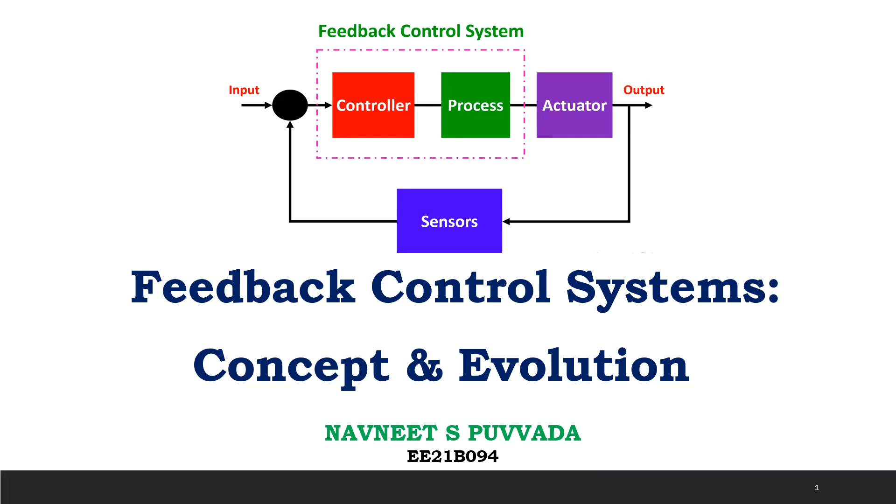So what exactly are feedback systems? Feedback systems are basically systems which use the output to modify the input to achieve some desired result or to maintain some particular state. That's simple - you use the output to modify the input.

This feedback control is seen everywhere - mechanically, electrically, and even biologically. Our body itself maintains our body temperature using a feedback mechanism. If our body temperature goes too high, vasodilation or vasoconstriction happens, and the temperature reduces. The flowchart here represents what I just said.

So negative feedback loops are seen everywhere and they're basically used to modify some state variable using the output. A device using a feedback system is also called a closed loop control system because, again, the output is fed back into the input.

This is the basic flowchart of how a feedback system works. You give the input, you find the error using the feedback signal. This error signal is appropriately analyzed using a controller, and then it is sent to an actuator and a plant which give the output. And this is again fed back into the input using feedback.

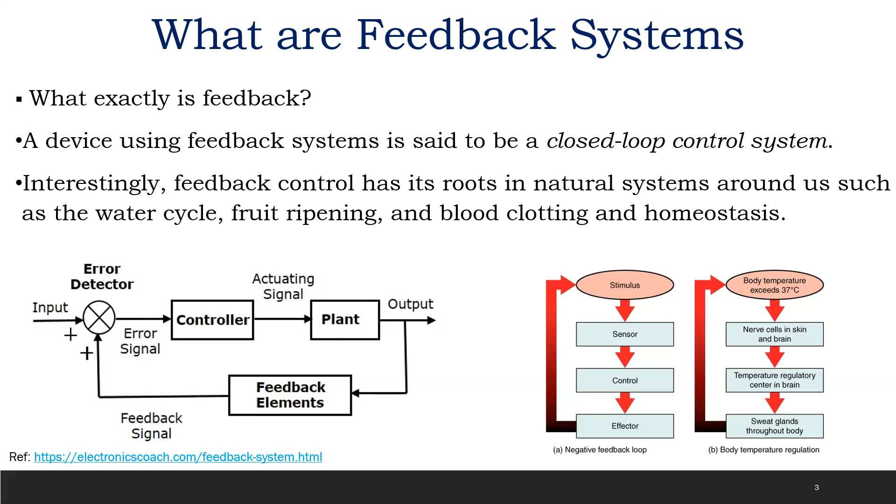Now, where can you see this feedback control, naturally and man-made? A really interesting point is that human evolution is the most perfect example of feedback. Evolution over long periods of time is only due to feedback, and it's responsible for evolution. So if a species does well, that is fed back in, and it says this species is more suitable, and more of the species grows. Darwin actually proposed that evolution is primarily due to feedback systems.

A mechanical example is what we use in our everyday life to flush our toilets. If the water level increases over a certain limit, this floater closes the valve and the water flow is stopped. This is again a beautiful example where the height is the state variable and it is fed back in as an input using the floater.

Another typical example are automobiles, and this is feedback we generally start with when we learn how feedback works. It's quite simple: the car measures the difference between the speed we want to go and the actual speed, and it varies the fuel rate accordingly to increase or decrease the speed.

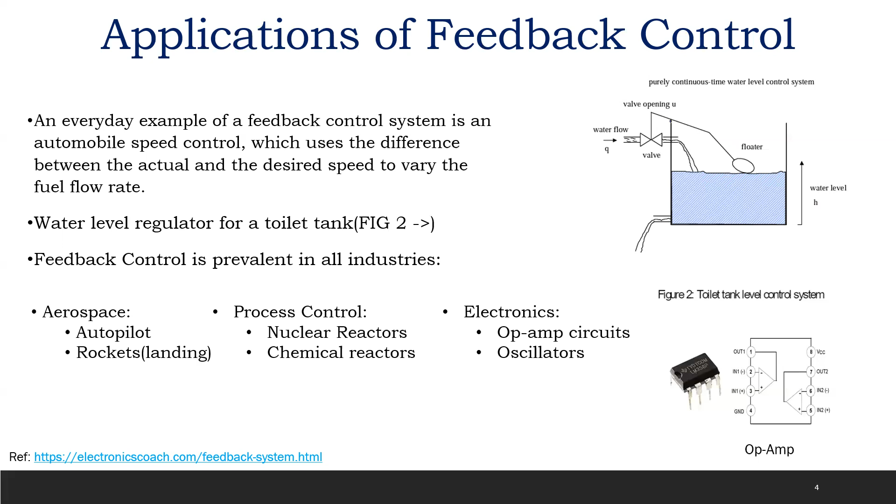So I've told you what feedback is and a few applications, and these can be seen prevalent everywhere - in aerospace, nuclear reactors especially, and of course your electronics, which we'll focus on with your op-amp circuits and oscillators. This is a picture of an op-amp.

Now let's come to the beginning - let's go to the early feedback systems and how exactly they evolved from scratch. The first few feedback systems were definitely mechanical devices. There was no electronics back then, but they still embodied the idea of feedback. A beautiful example is this water clock used to keep track of time.

Keeping track of time became more and more prevalent around the 1500s and thereon. They used these water clocks, which kept track of time using the water level, like we saw in the flush. As the water level increases, this dial turns by a certain amount of degrees - as simple as that. This water supply is controlled using the increase in water level, dictating how much water should be supplied and accordingly how much the dial turns.

Another great example is the steam engine, probably the first major mechanical example of feedback systems. It was probably the beginning of the crazy growth of feedback systems in the 18th and 19th century especially. They were used in steam engines to regulate the speed and power output of the engine, done by regulating the flow of steam into the engine - again quite simple, just like our lever and valve. It regulates how much input we give based on the output. This is a nice picture showing the governor and throttle valve.

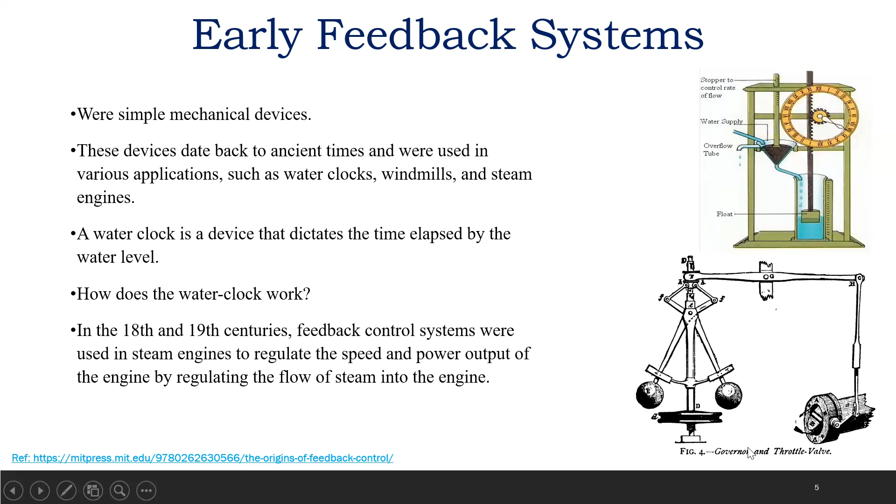Now let's come to the evolution of classical feedback systems. The evolution of feedback systems was probably divided between classical feedback systems and modern feedback systems. Let's go over how the classical feedback systems evolved.

This all started, like with most inventions, with the Industrial Revolution. During the Industrial Revolution, G.B. Airy developed a feedback device for pointing a telescope, and it was probably the initiation of how a gyroscope was built.

He saw that when a feedback loop was not designed perfectly, there were a few oscillations, there was ringing, and depending on the Q factor, there were a lot of oscillations in the system and ringing, which made the system very unstable, and we wouldn't want that in our design. So he analyzed this and came up with the differential equations governing these feedback systems, and used that to analyze instability in these closed loop systems.

So this was the start of analysis of feedback loops, scientific analysis of feedback loops.

Then came the well-renowned J.C. Maxwell. He analyzed the stability of Watt's flyball governor, and concluded that a system will be stable if the roots of the characteristic equation have negative real parts. So using that differential equation, when you find the roots of that equation, if the roots have negative real parts, then that system is stable. We still use this today in a very surface level analysis of feedback systems, and this is a great contribution to feedback systems. Thereby Maxwell established the initial control theory, or the initial theory of control systems.

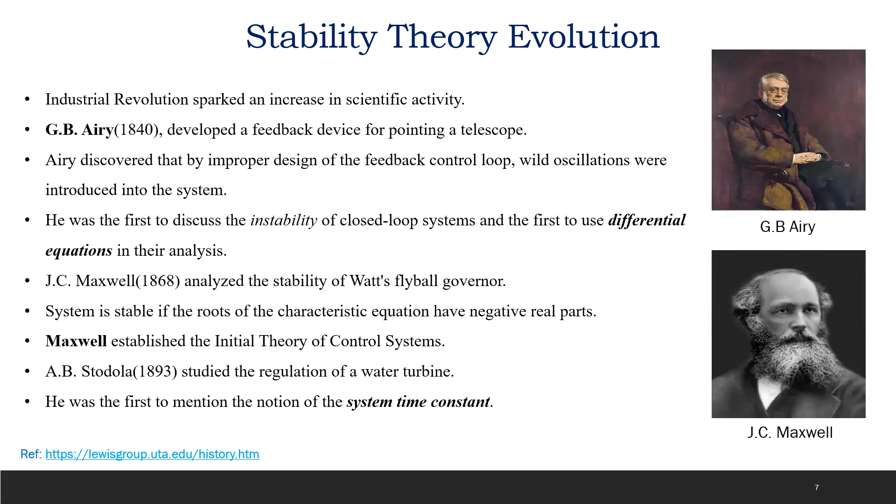Now comes the innovation at Bell Labs. Bell Labs is really well renowned and probably one of the hubs of the greatest innovations in the 20th century, and especially due to the World Wars, there was great motivation for innovation, especially in the communication field to win the war. Here, the mathematical analysis of control systems was carried out in the frequency domain.

Maxwell and Airy, all of them had done a precursor in control systems, basically a very surface level analysis using time domain differential equations. Now the Bell guys came up with very intuitive analysis using frequency domain analysis, especially using techniques developed by Laplace, Fourier, and Cauchy, which we're all very familiar with. Between the 1920s and 1930s, this analysis using frequency domain saw a huge boom, and its applications were unnumbered, showing a clear shift from time domain to frequency domain analysis.

And this is what the classical theory is based on. The classical theory of feedback analysis is based on frequency domain analysis rather than time domain analysis. So classical is analogous to frequency domain analysis. And three men actually in Bell Labs took this frequency domain analysis to another level.

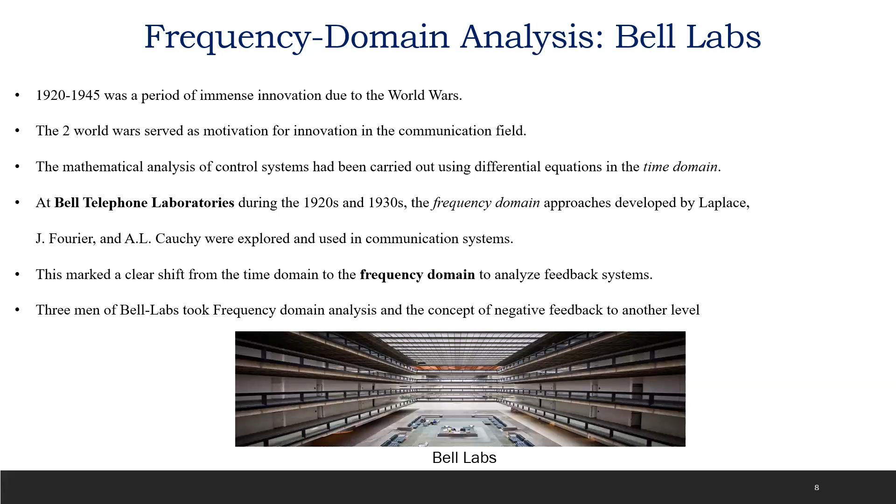By the way, Bell Labs is a company in the United States, and this was during the World War. It was probably one of the biggest companies in the world at the time, and they worked on a lot of different things. It actually came from the invention of the telephone by Graham Bell, hence the name Bell. Now we come to Harold Stephen Black, who was probably one of the fathers of the classical era of feedback systems.

Mr. Harold Black worked in Bell Labs in the mass communications division, and what he was majorly known for was the concept of negative feedback, which we still use and learn today. He wanted to reduce distortion in his amplifiers, which he was using in the telephone line that Bell was working on. He realized that by feeding back the output to the input, we can minimize distortion and get a clean output, and thereby came the analysis of negative feedback.

He also came up with the accurate design of fire control systems in World War II, and again was a major contributor to America's success. And of course, he formed the basis of operational amplifiers, which are completely based on negative feedback, and we still use today.

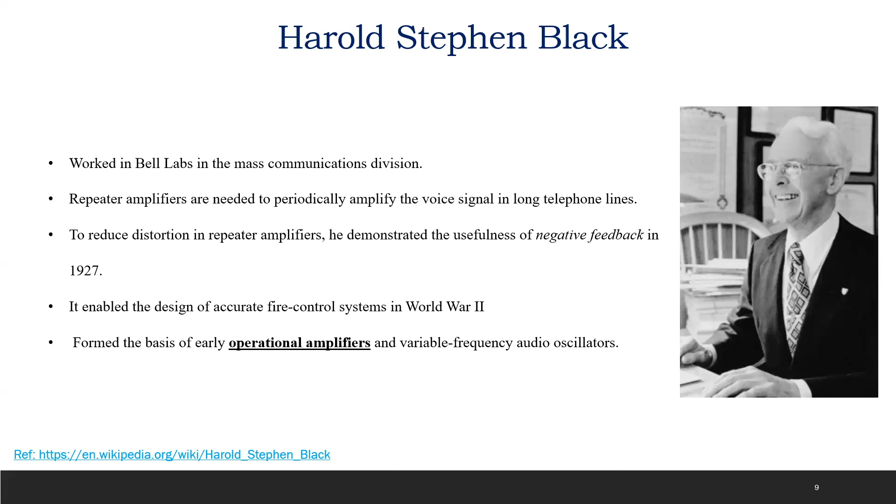And this plot is really beautiful and really easy to understand. To understand frequency domain analysis, you don't need any complicated time domain differential equations, but just by looking at a diagram, you can come to so many conclusions.

So again, he came up with the term called loop gain, which is basically the feedback factor into the gain of the amplifier. This simplified the stability analysis a lot. This analysis is the most comprehensive one in the frequency domain, even better than Bode's analysis, which we will cover later. And it can work when the system is unstable too.

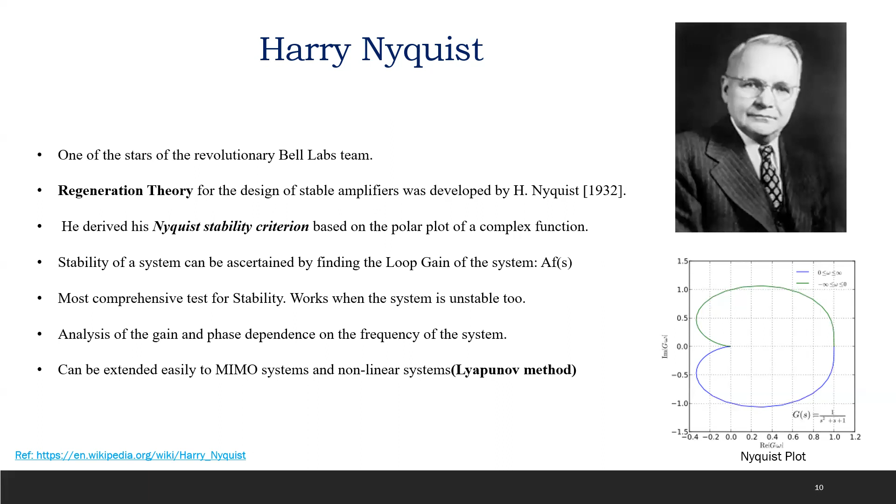Now we come to Hendrik Wade Bode. A lot of us are familiar with his Bode plots and his frequency domain analysis. Let me tell you a bit about him. He is also regarded as the father of information theory. He developed these plots called Bode plots, which basically use the magnitude and phase frequency response to analyze stability and to analyze the feedback system.

He also came up with the idea of phase margin. We all know if phase margin is less than 0, then that system is unstable for sure at unity gain frequency. And this concept of phase margin is so handy in designing feedback systems. It is really important, and Hendrik Wade Bode is the one who came up with this.

He also worked with automatic artillery weapons and anti-ballistic missile systems. So with his theory and knowledge of feedbacks, he helped the US in tracking systems, in weapons tracking systems, which needed accuracy in location and, of course, needed feedback systems in their gyroscopes.

And once again, his Bode plots and his analysis of feedback system was the fastest and the most intuitive way we could analyze feedback system. And it's still used by students in colleges now.

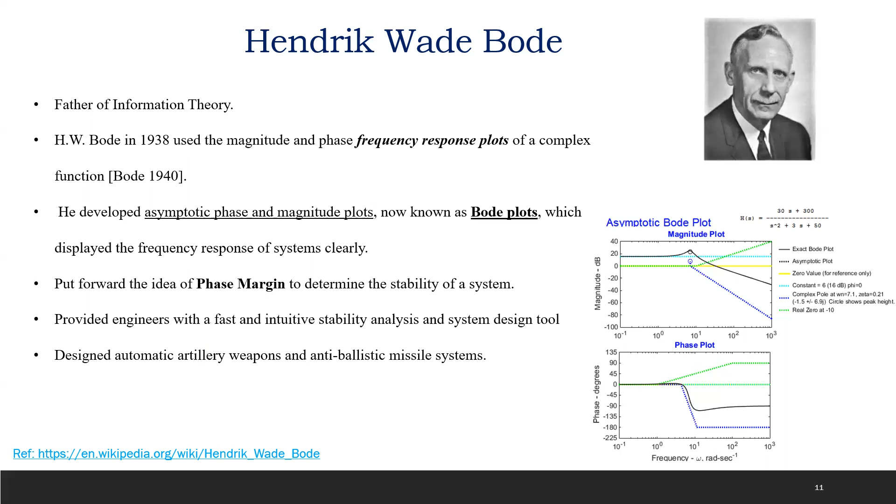So after this, as I said, the scientists I mentioned were working on developing feedback systems. But what was their main motivator? Their main motivator were the world wars. And the world wars were truly a catalyst to develop, because now feedback systems were literally a matter of survival. Location tracking of their weapon systems was so important and could win wars. And that accurate location tracking could be done only using accurate feedback systems.

And this led to the invention of the PID controller, the proportional integral derivative controller. This was brought up by Minorsky, and he used this three-term controller to steer ships. I'll talk about this in the next slide.

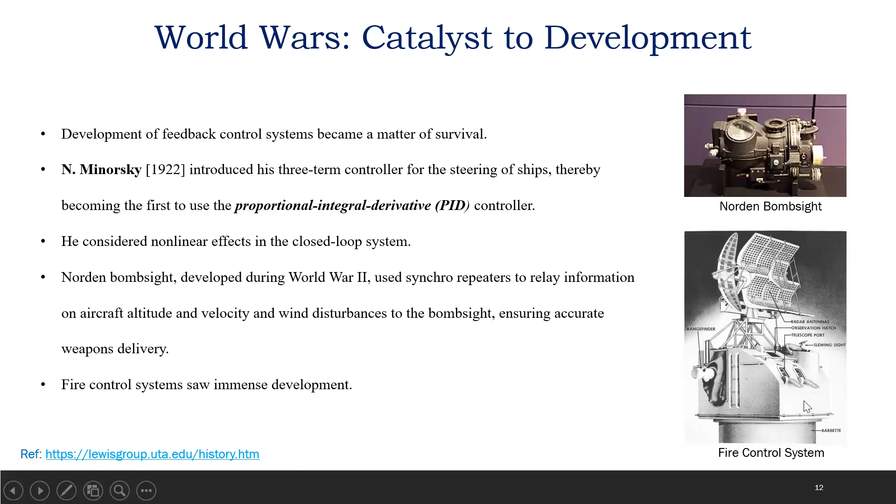Fire control systems, as I said, radar technology using feedback systems again became really popular and really important to win the wars.

Now we come to the PIDs. So these PIDs, they basically made navigation really easy. And it's almost like an advanced gyroscope. It's a control device that was an advanced gyroscope, and it enabled engineers to design and tune complex control systems.

And it was the culmination of the work of Minorsky, as I mentioned before, Harold Black as well, and he came up with the feedback control system. We've spoken about it. And most importantly, Ziegler in 1950 came up with the method of tuning PIDs and making this PID application really accurate.

These PIDs are used everywhere in manufacturing, chemical processing, robotics, everywhere. It's currently being used in levitation as well, to ensure stability of the pod.

It measures the proportional relationship between the error and the output. So a higher P, or higher gain, will lead to a stronger response to the change in error, when a lower gain gives a weaker response. It's as simple as that.

Now this integral, what does it do? It basically integrates this error which we calculate here, input minus output, over some time, and it multiplies with some integration constant. And this helps remove any steady state errors and provides a continuous error correction. So basically, as I deviate my location, it continuously measures this error and makes sure I deviate back to the actual position which I need to be at.

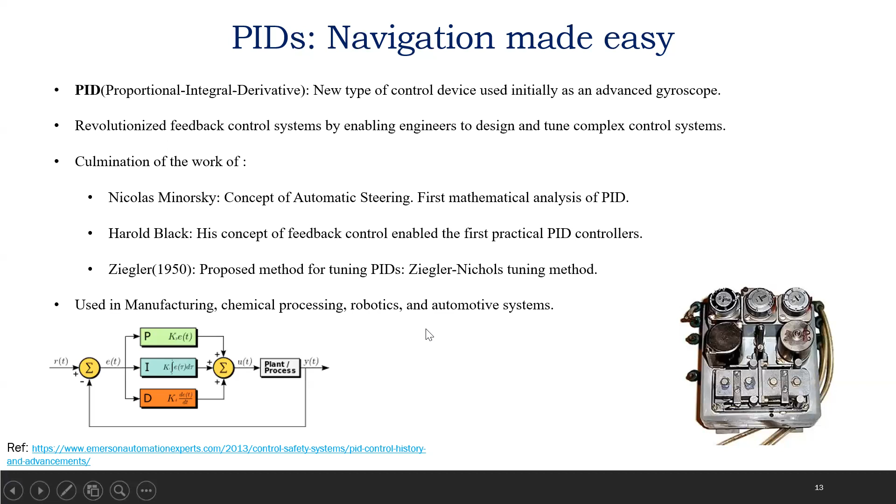Now we come to our modern feedback system. So what are these modern feedback systems and what is the difference? Why did we come up with this modern feedback?

Classical control theory was frequency domain analysis, and it was applicable only to LTI systems. Bode, Nyquist, all their analysis was applicable to LTI systems, and only to single input, single output systems. Non-linear systems were a big problem, and since the space race was coming, a lot of analysis required non-linear analysis. This classical theory had a lot of drawbacks.

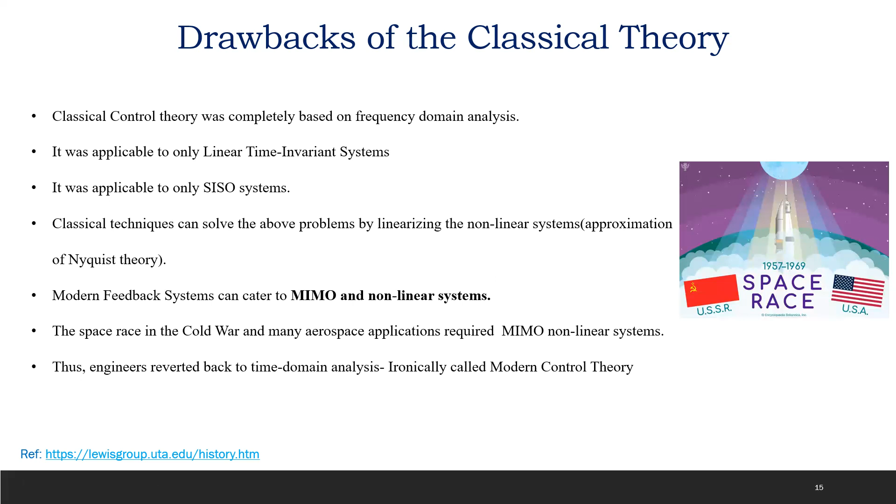This led to the modern feedback system theory, which catered to multiple input, multiple output systems, your MIMOs, and nonlinear systems, which was the biggest advantage of these modern feedback systems. The space race, especially the Cold War between the US and the USSR, required such MIMO nonlinear systems, especially in space applications.

Ironically, from Maxwell, they had changed to frequencies, from time to frequency, and now this period, this modern control systems, marks a change back from frequency to time domain analysis.

So how did Sputnik change the game? This is really interesting. Sputnik was the first satellite launched, and this was launched by the USSR. Lyapunov, as I mentioned before, extended Nyquist's theory using time domain analysis, and he came up with nonlinear control design. This was a major factor in the advancement in the space race for the Soviet Union and how they could launch Sputnik so quickly.

Remember, space applications require really precise measurements and extremely precise gyroscopes, only possible with multiple inputs with so many different variables. Lyapunov and his nonlinear techniques and MIMO techniques could only come up with this analysis of modern control systems, and could let the USSR launch Sputnik.

This also motivated the USA to come to modern control, to leave the feedback, to leave the frequency domain and come back to the time domain. This really motivated them to show a boom in feedback theory.

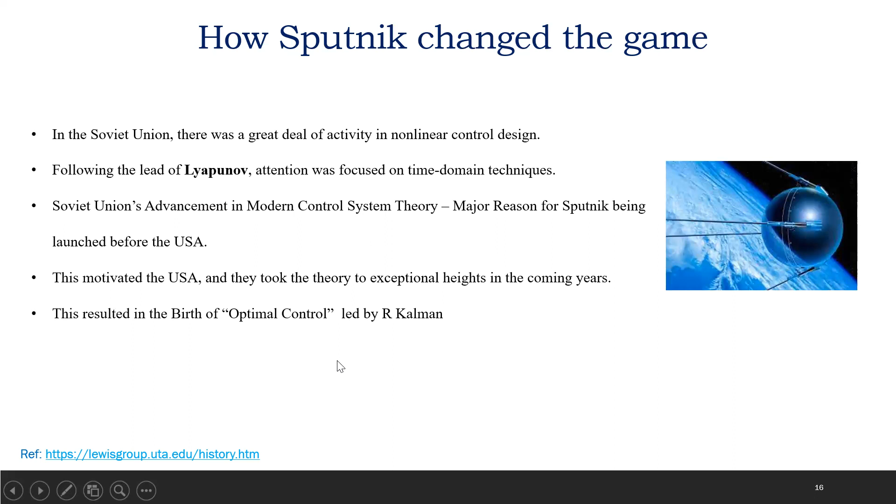This led to the birth of optimal control, led by R. Kalman. Rudolf Kalman is really a great man who we will cover soon.

So what happened in this optimal control theory? R. Kalman analyzed naturally occurring control systems and realized that what they did was minimize some control variable, some function, which we call here a quadratic generalized energy function, or a performance index.

They basically minimize this time, or this quadratic energy function, with all the constraints given, this multiple inputs given, and they minimize them. So he came up with control theory based on optimization, which is why it's called optimal control theory. This again marked the birth of the modern control era, and was probably the biggest advancement in control systems, led by the three scientists, especially R. Kalman.

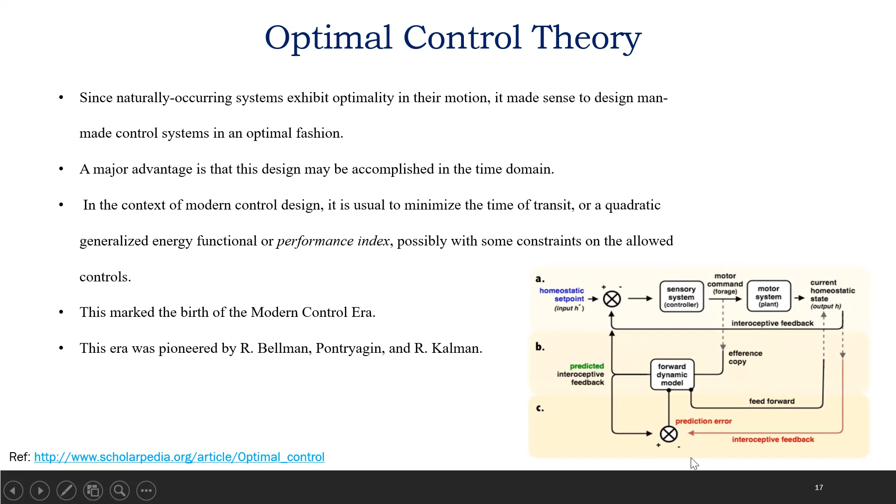It's a really complicated feedback circuit, but it gives a gist of how optimization occurs based on the output you want to reach.

So Rudolf Kalman, again the father of modern control, was an electrical engineer who graduated from MIT and Columbia. He published three groundbreaking papers.

The first was the time domain control analysis of nonlinear systems. The second was the optimal control of systems, which again used that quadratic energy function he minimized, called the LQR. The third, and most important, was about the Kalman filter, which made him the father of optimal filtering and estimation theory, so important especially today.

This Kalman filter is still used in radars, GPS, and computer graphics. And most importantly, for the US, this filter was used in the first lunar landing.

After the Kalman filter was invented, this filter was actually on the Apollo rocket, which helped provide navigational data for the first lunar landing. America could not have gone to the moon first if they did not have this Kalman filter. This filter provided absolute optimal solutions.

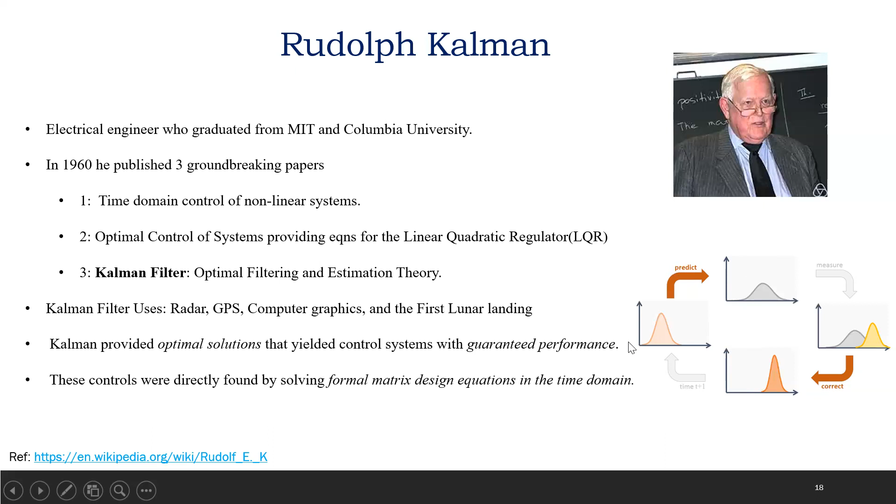He also came up with control systems with guaranteed performance. These controls were found using complex matrix equations, which were solved in the time domain. This is an example of how the Kalman filter works, showing time domain analysis using the t-1 sample, which is the output sample, to modify the input sample.

Now we come to computers in control design and implementation. The major problem in this modern theory was the cumbersome matrix equations. Back then there were no computers, so everything had to be solved by hand, and the differential equations were massive and required a lot of computing power. So this was a big drawback.

This drawback was removed with the invention of computers, and this boom in control theory and invention of computers went hand in hand. With computers, the equations became more complex, more accurate answers were found, MIMO systems were used, nonlinear systems could be used, and digital control theory was born. Because now we need to feed in information using bits, converting this analog time domain analysis to digital analysis or digital filtering became really important, and digital control theory was born.

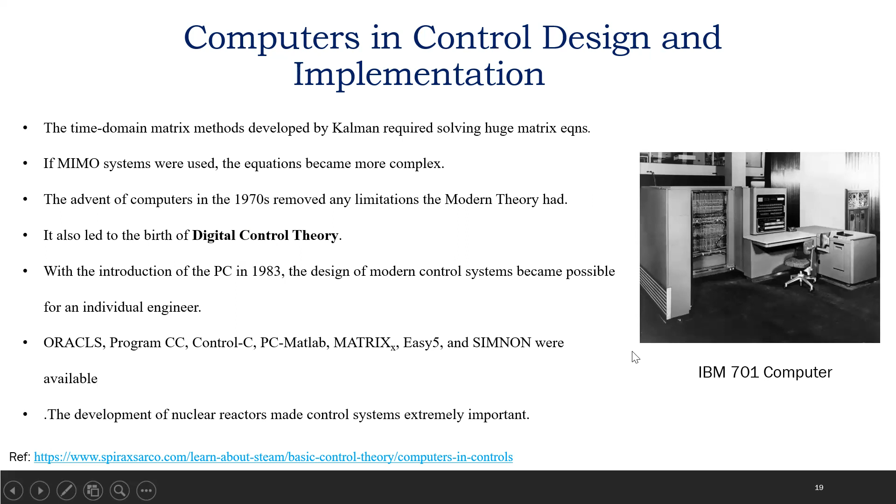Finally, I'd like to talk about the differences between classical and modern control. The classical control theory came first, and it focused on frequency domain. It focused on transfer function based analysis, and was applicable only to LTI systems with single input and single output, dealing with input and output variables.

It was much more intuitive and very easy to grasp and design these feedback systems. It was analog in nature, and lesser computing was needed. A lot of this could be done by hand, as it was very easy to grasp and intuitive.

Coming to modern control, this was developed later, especially during the Cold War. It focuses on time domain analysis, differential equation solving, and can be applicable to nonlinear and multiple input, multiple output systems. It deals with state variables mainly, rather than just input and output variables.

It is definitely not intuitive. It is just a very rigorous set of equations, and it is highly mathematical. It is digital in nature and requires a large amount of computing resources, especially to solve those matrix equations and differential equations.

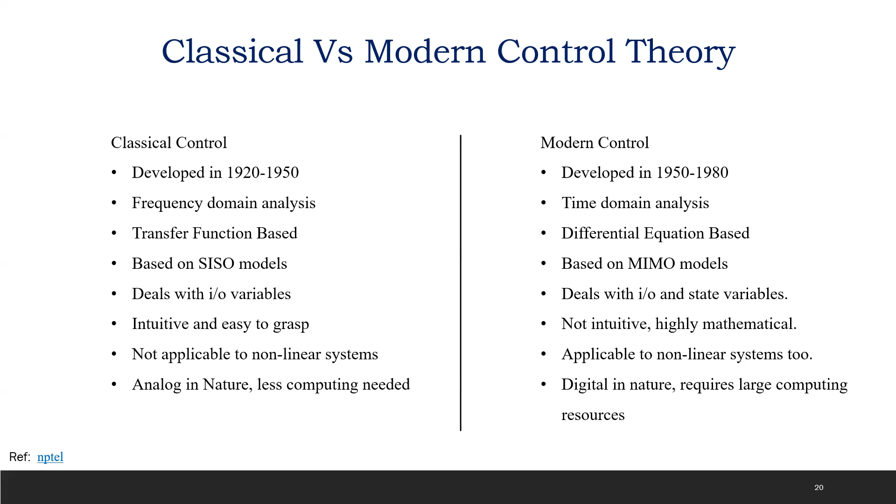Now we come to the current scenario. Right now, the theory which is used most is robust control theory. This has a blend of the modern and classical techniques, a blend of the intuitiveness of the classical techniques and the accuracy of the modern techniques, and this is prevalent in all industries.

Control systems are so important, especially with the advent of AI and feedback systems in our technology. It has become so important in factories and manufacturing. Any automation or robotics requires control systems, and it is completely imperative for the functioning of any technological ecosystem.

The advent of AI has also helped come up with much more robust and faster control systems. Literally, control systems are designing control systems - quite nice if you think about it. This has also led to the field of intelligent control systems, which again uses AI, and it is still developing today and has a large scope of growth.

As I said, this has also led to huge automation in all industries. Control systems literally are the most important part of automation because they decide where your output should go.

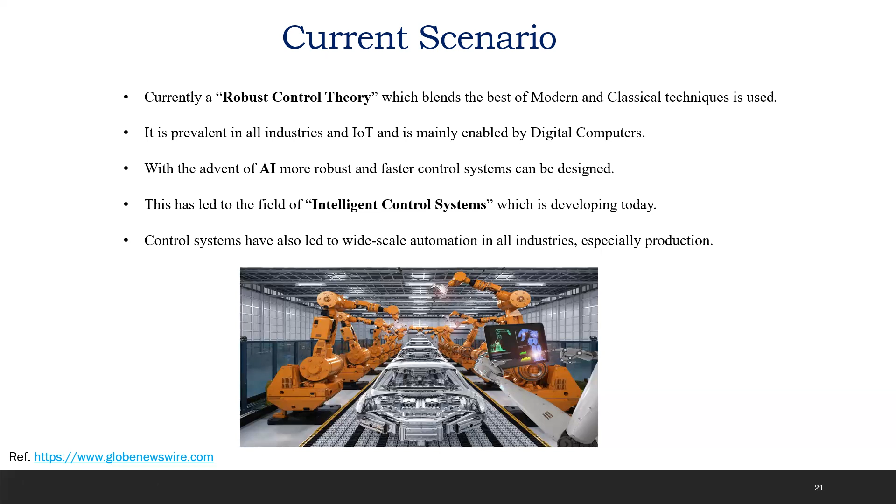Currently, the control system market is massive at 180 billion market cap, with major players like Honeywell, Siemens, Emerson, General Electric, and Mitsubishi. As you can see in this graph, India, China, and US are the major markets for these control systems, where the work of control systems is actually happening and where automation is actually happening. This picture shows different companies working on developing these intelligent control systems.

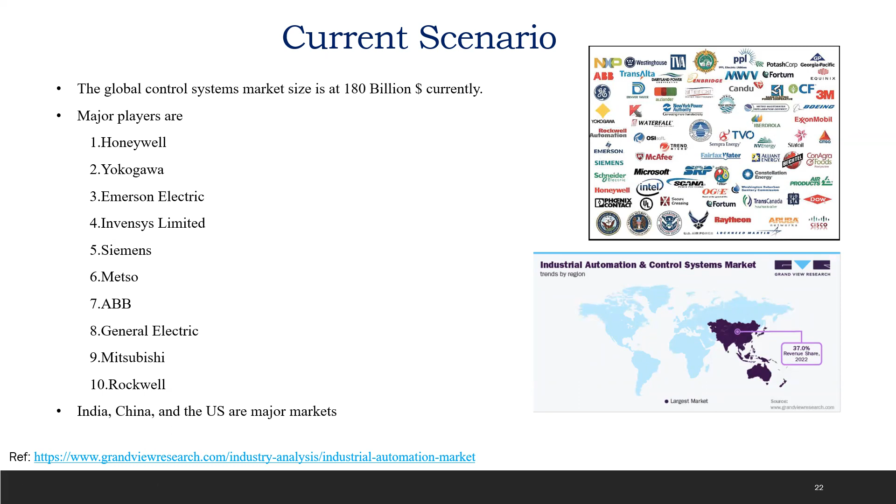So that's it for control systems and its evolution. I hope you understood its concept, how it exactly works, and how it has evolved from frequency domain analysis, or rather time to frequency back to time domain analysis. I hope you enjoyed the journey from your steam engine to your artificial intelligence control systems. So thank you for listening.